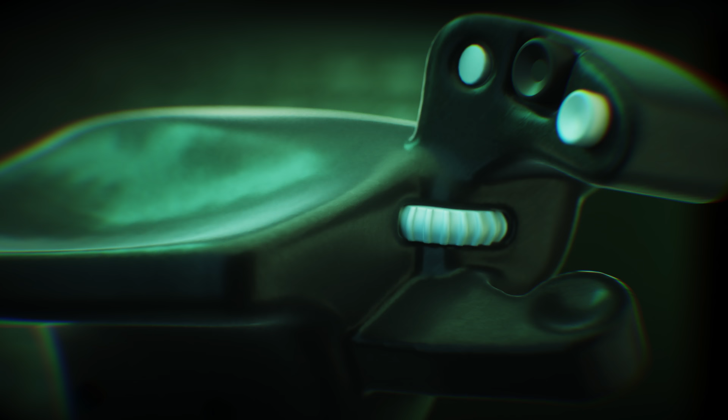With a turn of this wheel, the pilot effortlessly controls the nacelles, tipping them forward, trading vertical rotor wash for forward thrust. As this transition happens, the V-22 is neither helicopter nor plane, and the computer has to gradually blend both control logics together until the transition is complete. But once complete, the V-22 is capable of flying nearly twice the speed of a Black Hawk helicopter.

The V-22 is now flying low to the water to avoid ground radar detection on the coast. It is sprinting at 500 kilometers per hour, reaching the shoreline in less than 30 minutes. The pilots expected the cover of darkness, but they are met with a well-lit, populated sprawl, where they could be exposed to thousands of eyes. Forced to improvise, they thread the needle, aiming for the single darkest patch in a sea of city lights.

Meanwhile, the situation on the ground is becoming desperate. Enemy vehicles have nearly cornered the pilot, and he is forced to call in a danger-close bombing run from US Harrier jump jets, dropping 500-pound laser-guided bombs, obliterating the trucks and forcing the pursuers to retreat in chaos. The explosions buy the crucial seconds needed for the extraction.

It would have taken a standard rescue team hours to fly the 300 kilometers, but the V-22 arrived in just 41 minutes. As they approached the landing zone, the pilot rolled that dial back, redirecting the V-22's thrust at the ground, taking the V-22 from 500 kilometers per hour to a standstill. Opening its rear ramp amid a chaotic man-made sandstorm, the pilot sprints in from the shadows. A simple thumbs up, and in less than 90 seconds, the transformer raises its wheels off the ground, vanishing back into the clouds.

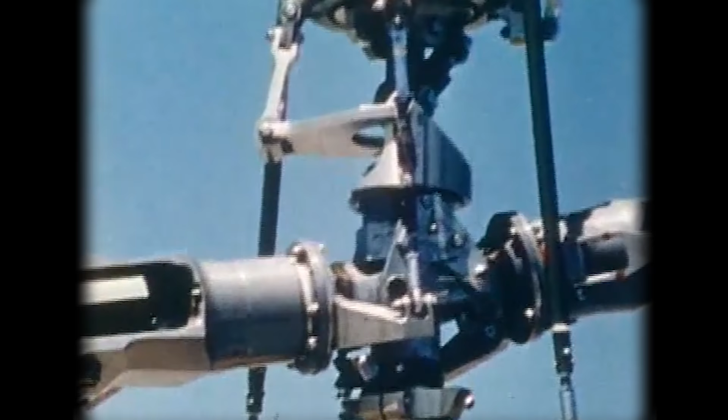The development of the V-22 Osprey began in the early 1950s with the XV-3, a clunky aircraft with a piston-powered engine installed in the fuselage behind the pilot, with a 2-speed transmission allowing the rotors to operate at 2 speeds for hover and cruise. The rotors were mechanically linked to the engine through the wings, with the entire rotor assembly rotating through gaps in the fairings.

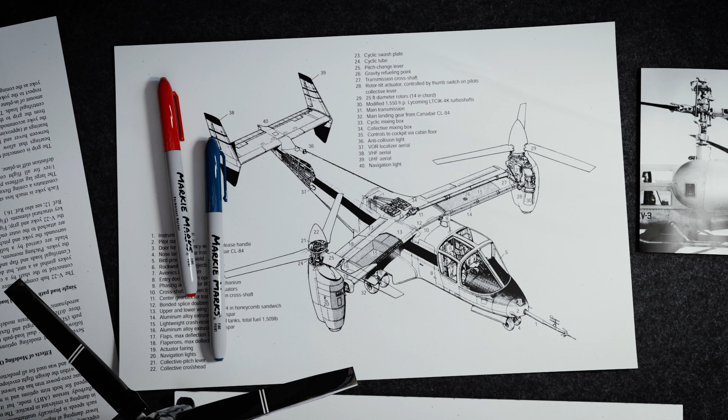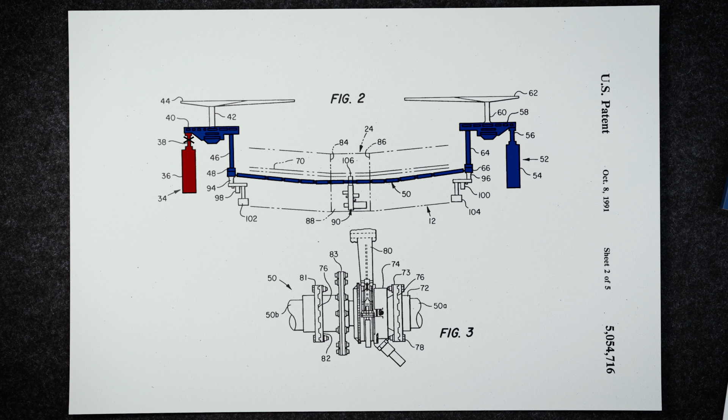But this created a new problem: how to synchronize the engines. The XV-15 developed an engine synchronization system that would carry on through to the V-22, a cross-shaft through the wings to keep the rotors in sync. The only time they would need to carry a large torque would be if one engine failed, where an automatic clutch disconnects the failed engine, letting the other engine drive both rotors through the cross-shaft for a single engine landing. With the smaller load, the shafts and connections could be a lot lighter.

Up to the late 70s, these aircraft were mostly proofs of concept, but everything changed with one failed mission. Operation Eagle Claw was a US rescue attempt in April 1980 to free 52 American hostages in Tehran. The plan relied on 8 Navy RH-53D helicopters flying inland to a remote desert refueling site, Desert 1, and meeting 2 C-130s before continuing on to the city. Dust storms and mechanical failures cut the helicopter force from 8 to 5, below the minimum to continue, forcing commanders to abort the mission.

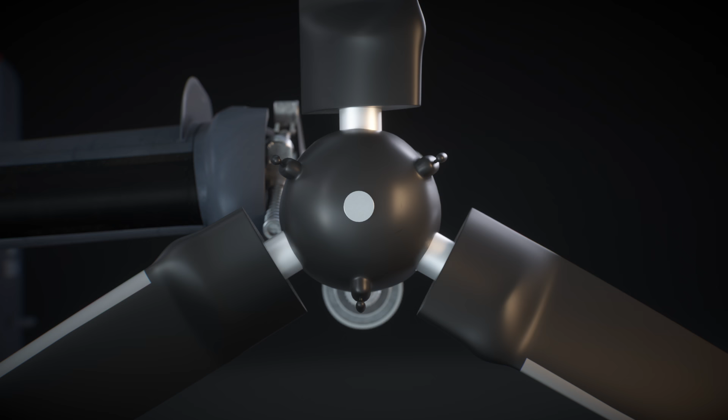Operation Eagle Claw highlighted a blunt limitation. Conventional helicopters could land anywhere, but they couldn't reach deep targets quickly without high-risk refueling stops. So, in 1981, the Pentagon responded by approving a program to design a transport aircraft capable of vertical takeoff and airplane-like cruise, setting the stage for the XV-15's 7-year-long evolution into the V-22 Osprey. The core concept of the Osprey depends on one mechanism, the conversion actuator responsible for the tilt that gives the Osprey its tilt rotor status.

Even though the V-22 can fly with the nacelles at any incremental angle, in practice, to avoid complex aerodynamics, pilots use one of 3 modes: helicopter mode with the nacelles around 90 degrees, airplane mode with the nacelles locked at 0 degrees, and short takeoff and landing mode typically set around 60 degrees. The actual tilting mechanism has to handle a lot of forces that vary drastically depending on the flight regime. When the nacelle is in helicopter mode, the engine and rotor sit in front of the pivot, so gravity wants to roll the nacelle forward, compressing the actuator.

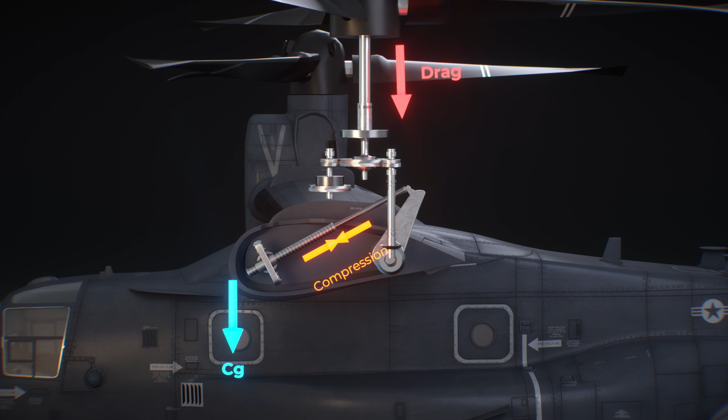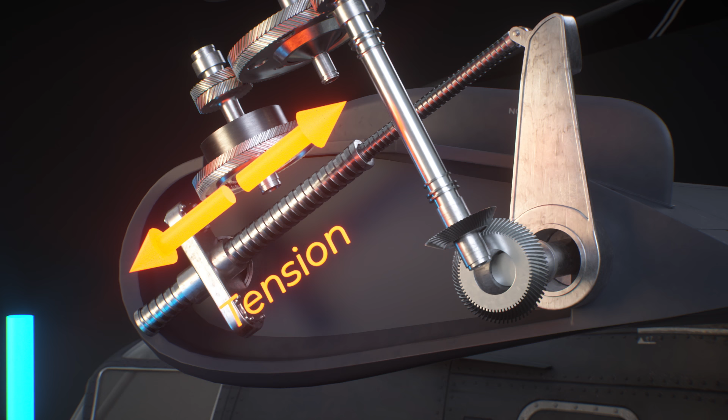But as the nacelle tilts down and the Osprey picks up speed, drag wants to push it back into the vertical position. That compression force decreases until around 80 degrees. As it rotates further, the load flips into tension. But once you get past the 45-degree point, the balance shifts again and the nacelle starts pushing the actuator down, putting it back into compression as it drives all the way down to the 0-degree downstop. Now the actuator's job is to keep the nacelle locked in place.

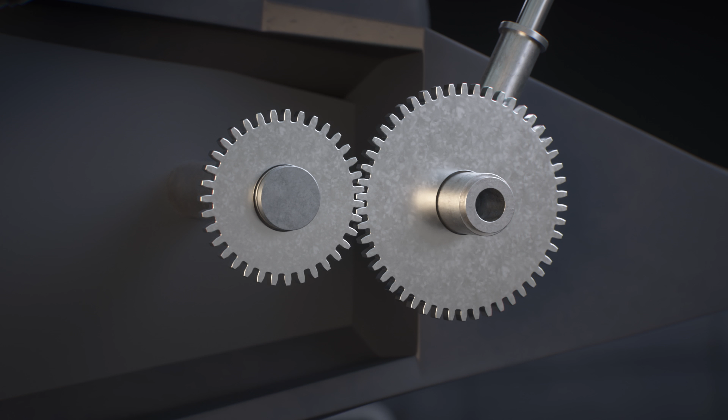With these changing loads, a gear drive would shove huge torque through small teeth that would wear and crack. A screw drive spreads that load through a larger contact area, but there is one problem with using a large, singular screw. The prop rotors reach well below the fuselage of the aircraft in horizontal flight. This means the V-22 cannot land like a traditional plane. If one of those screws jammed in horizontal flight, the V-22 would have no safe way to land. So, instead of having one large screw, the V-22 uses a double telescoping screw that saves space and provides jam redundancy. The size of these prop rotors is a great physical representation of the compromises that the V-22 had to make.

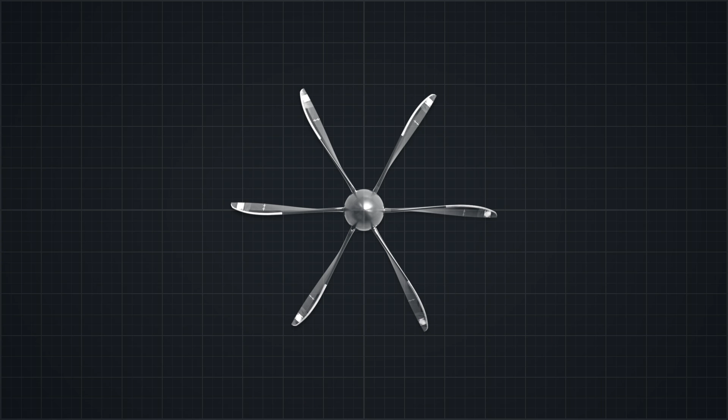They need to be both helicopter rotor and airplane propeller, and this blend of functions is what gives them their unique shape, sitting between the 4-meter diameter of a military transport propeller like the C-130's and the gigantic rotors of the Sea Stallion helicopter. The dual use also demanded a unique twist in the blade profile.

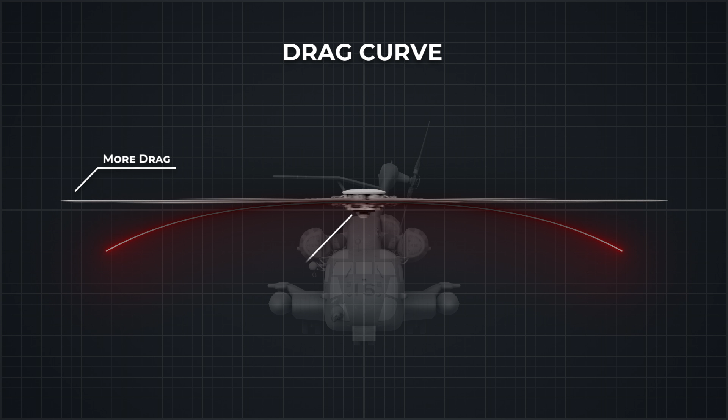Helicopter blades are twisted to adapt to faster flowing air at the tip of the blade, which would result in a disproportionate amount of drag here compared to the slower moving root. So the blade twists, usually around 8 to 14 degrees, to lower the angle of attack of the blade at the tip and balance lift.

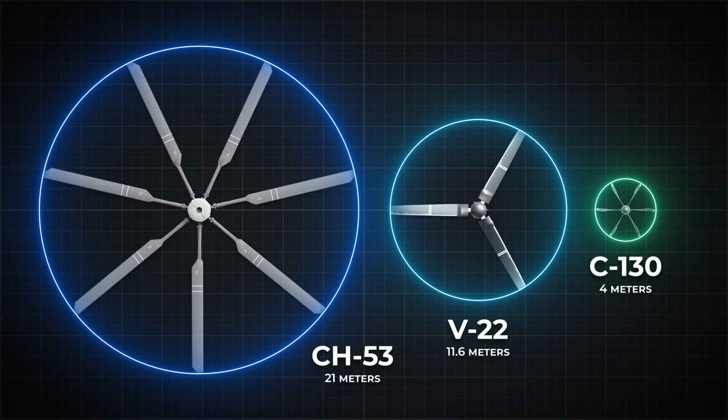The V-22, however, has a massive twist angle of 47 degrees, an aggressive degree of twist driven by the prop rotor's need to adapt to high-speed horizontal flight. These are small helicopter blades, but absolutely massive propellers.

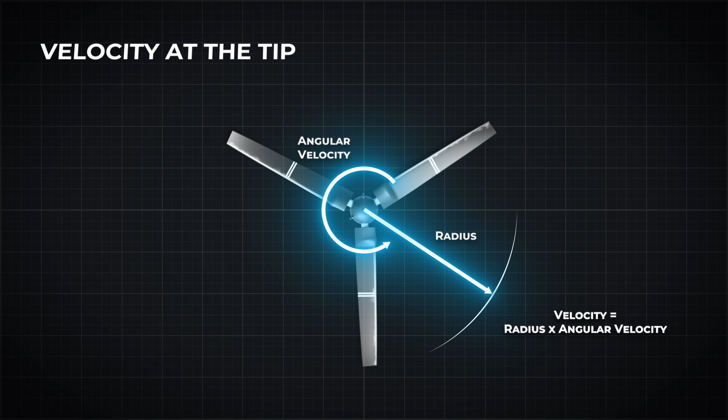In high-speed forward flight, the velocity of oncoming air adds to the high-speed rotation of the blades, with the airflow at the tips flirting at the boundary of supersonic speeds. The high degree of twist ensures the prop rotor can produce lift efficiently across its full length, despite the huge variation of airflow speeds it encounters.

These tip airflow velocities limit how big a propeller can get, and that's a problem because the massive propeller is still a small rotor, and that really hurts the V-22's hover efficiency. Hover efficiency is measured by disk loading, the ratio of an aircraft's weight to the rotor's circular area. A rotor works by pushing air downward to generate upward lift.

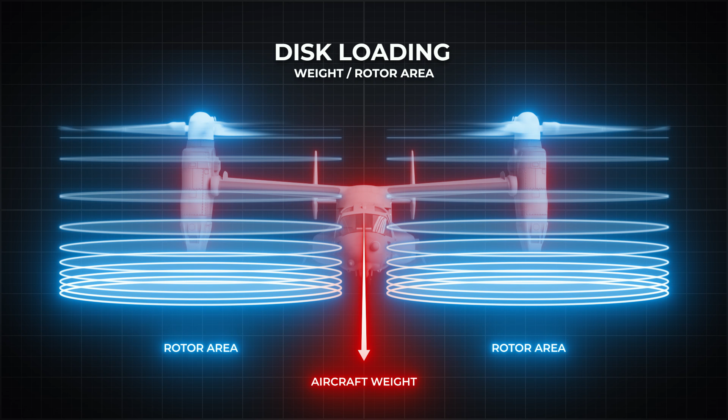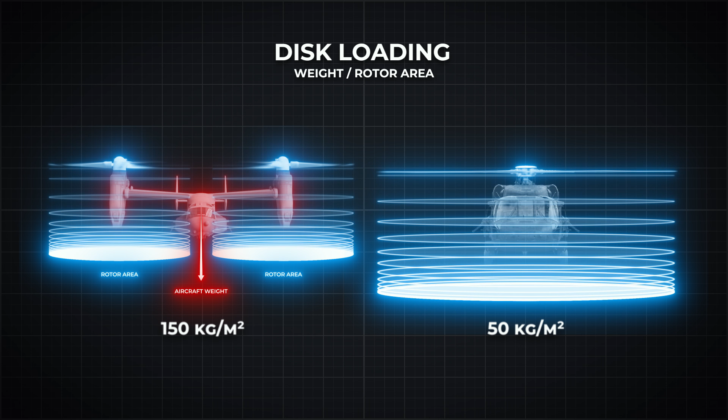A helicopter like the Black Hawk has a disk loading of around 50 kilograms per square meter of its rotor area. The V-22 is closer to 150 kilograms per square meter. That means it needs to push air down much faster to fly. The V-22's downwash can reach velocities of up to 150 kilometers per hour. That's not just inefficient, that's stronger than hurricane force winds, which can make ground crew operations a little difficult.

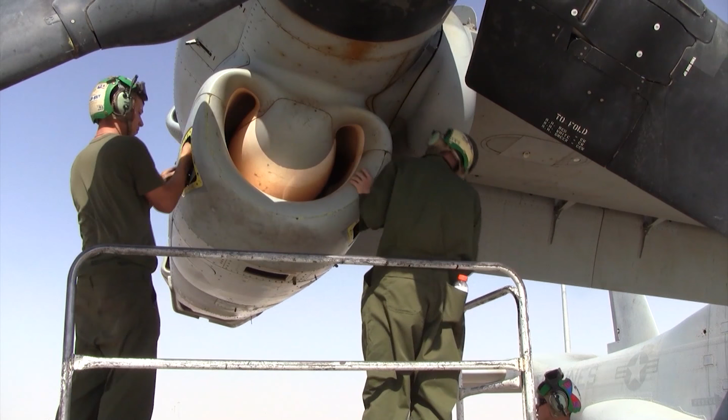Powering the aircraft are two Rolls-Royce turboshaft engines mounted right on the wing tips, to prevent the whirl flutter-induced oscillations that knocked out the test pilot of the XV-3 prototype. The engineers of the V-22 needed light and strong materials to stiffen up the structure, and the V-22 benefited massively from a decade of composite material development for aircraft, like the F-14's first of its kind boron-coated tungsten fiber epoxy composite taileron. Composites are everywhere in the V-22.

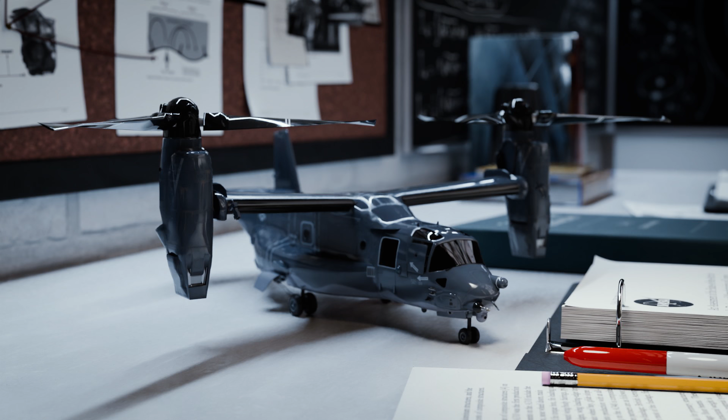2,700 kilograms of the aircraft's total 6,000 kilogram structural weight is taken up by carbon epoxy composites. The wing structure got a stiffer carbon composite than the fuselage or tail, helping it deal with the huge variation of loads it was expected to hold and prevent them vibrating the entire aircraft out of the air. This is fairly standard composite manufacturing now, but back then it was worthy of NASA reports on state-of-the-art manufacturing. I wasn't lying when I said composites are everywhere in this.

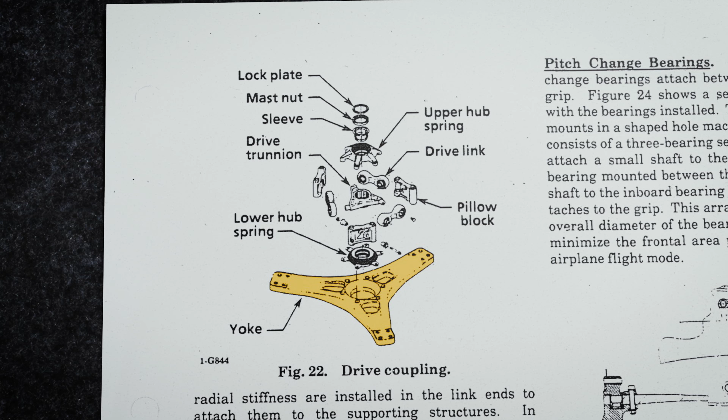But on this long list of achievements, the prop rotors and their multiple parts stand out the most. Take the yoke, a part with a fairly simple geometry, an attachment point for the central driveshaft and 3 more for the gigantic folding blades. But it is constantly being battered by cyclical forces. Picking the wrong material could have it humming like a tuning fork before it cracks and fails.

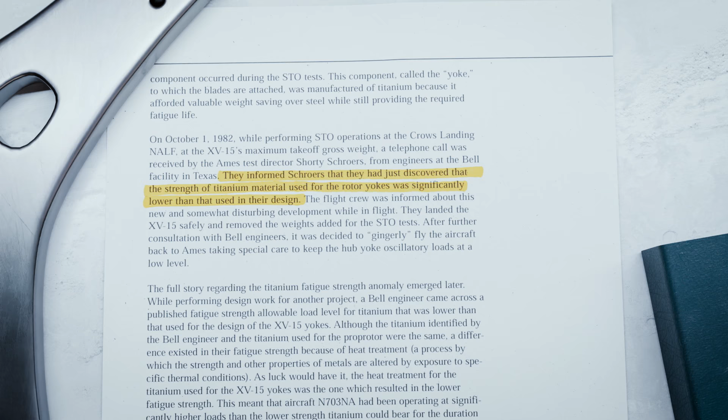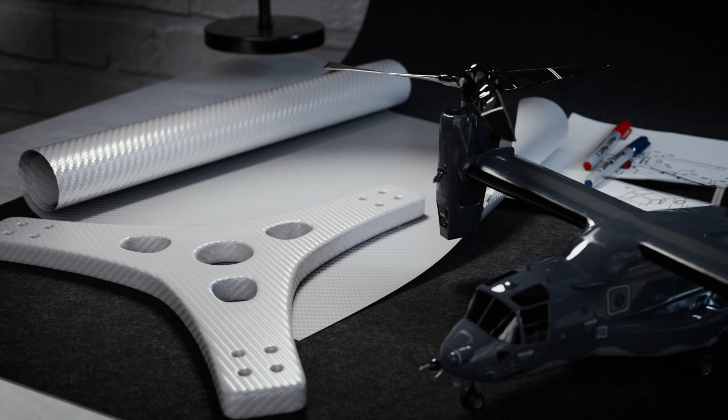Titanium was tested in the XV-15, but it fatigued and cracked too quickly, forcing the engineers to rely on heavier, sturdier stainless steel. By the time the V-22 came around, they had figured out how to make it out of a much lighter S2 fiberglass composite, a glass fiber made from magnesia alumina silicate. Although not as strong as the carbon fiber blades it was securing, this material played a very important role with a unique property: its lower mechanical impedance.

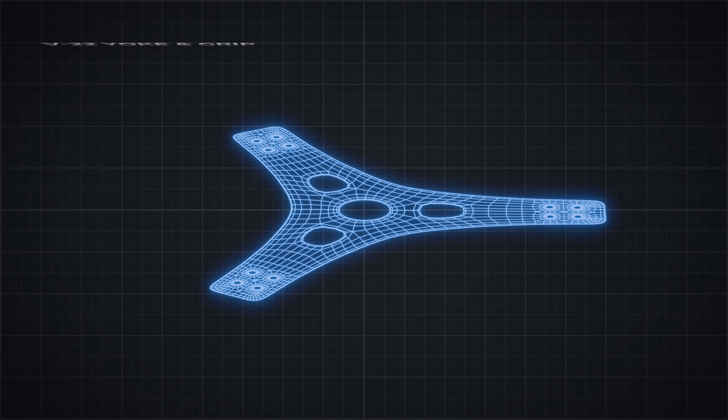It's fantastic at absorbing, flexing, and transferring force without vibrating, which is why it's used in golf clubs and was recently used in the US Olympic team's pole vaults. They added layer after layer of this composite to build up this part to be strong enough to hold the enormous weight of the blades as they swung around and tried to rip free of their restraints, while also dampening a constant onslaught of vibrations that would crack another material.

A problem they actually encountered further up the blade with the carbon composite part. The blade was made from stiffer, stronger carbon composites, but it also needed to fold over itself during the stowing process.

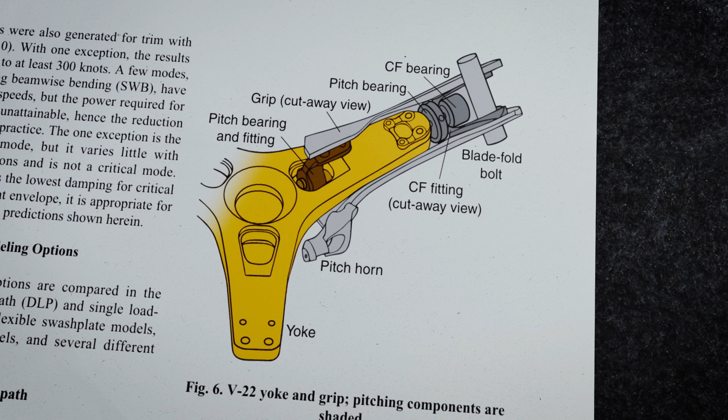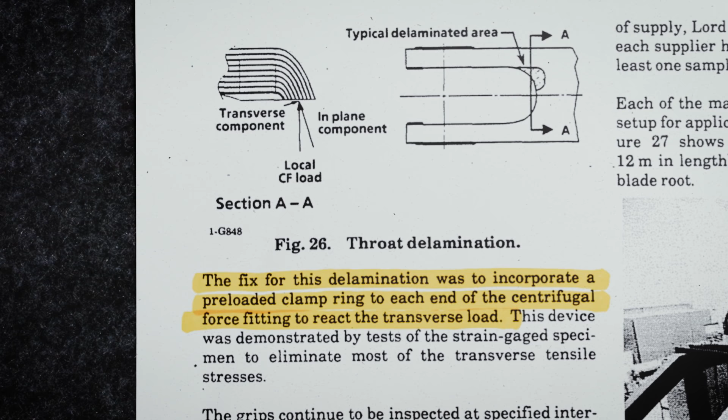During the development of these hinges, the grips kept delaminating and failing, eventually requiring the addition of a preloaded clamp ring to each end of the centrifugal force fitting to react the transverse load. Composites are not tough materials either. High-speed debris strikes can easily shatter them, so they need to be armoured.

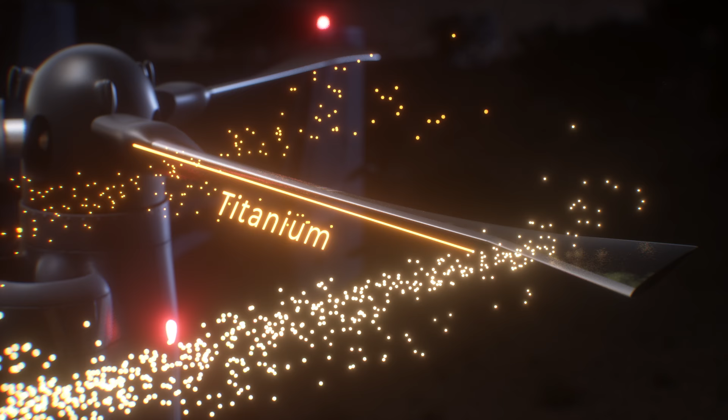The leading edge is protected with a hot-formed titanium strip over the first 3/4 of the blade. Titanium gives a tough, erosion-resistant surface without adding too much weight. Further out, the impacts get much harsher, so further out they bond an electroformed nickel cap. Nickel is harder and more durable against high-speed impacts, but it's also heavier, so they keep it limited to where it's needed. In the worst conditions, these strips of metal act like the titanium skid plates of F1 cars. The blades impact the hard silica sand at immense speeds, creating 2 halos of hot metallic debris.

The rotational speed of these 2 prop rotors need to match, particularly in hover, where unequal lift will quickly cause a crash. The problem was, the only way to reliably ensure that two engines operate at the same speed is to link them mechanically, and the path between them was a veritable mechanical obstacle course.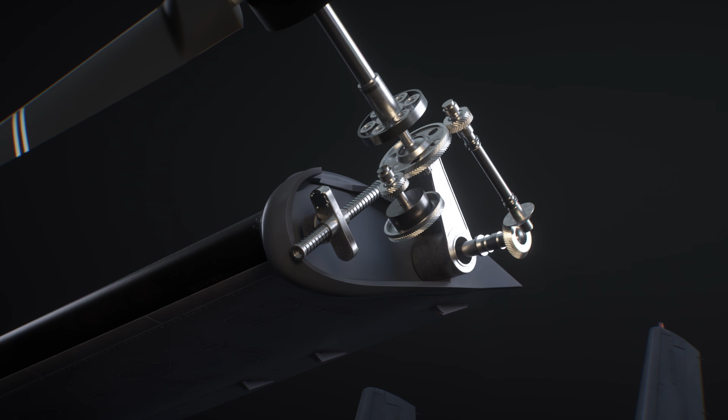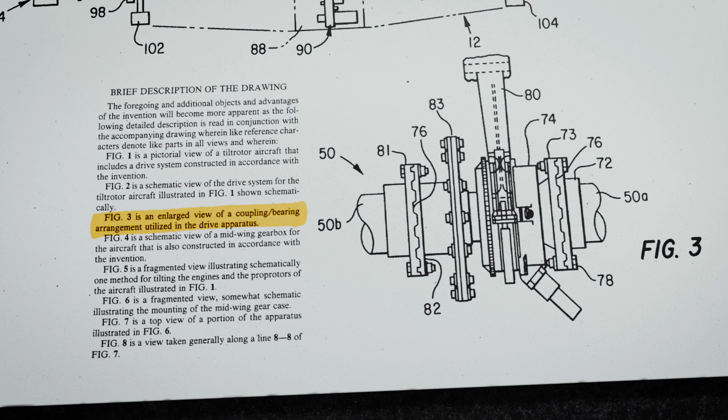On top of navigating these angles, this drivetrain had to deal with the nacelles rotating, the wings flexing, and the entire wing rotating parallel to the fuselage on a giant ring, all the while rotating 6,300 times a minute, and in the event of an emergency, be capable of transferring half the engine's torque to the other engine, so it could land less aggressively in an engine-out situation, with a final prayer that they could somehow not make this a nightmare to maintain.

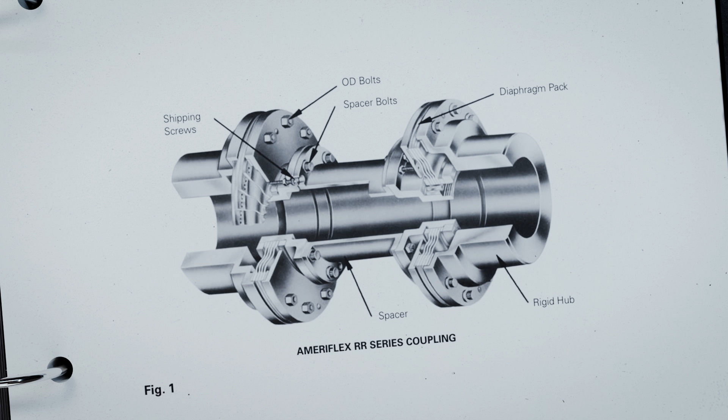Remarkably, the V-22's engineers developed an innovative, lubrication-free coupling system, replacing the lubricated gear system of the XV-15. A flexible coupling that was stiff in torsion and could handle spinning at 6,300 RPM and do it even if the shafts moved 3.5 degrees out of alignment. This is called a multi-disc convoluted diaphragm flexible coupling. You can buy off-the-shelf versions yourself, but the V-22 was an extreme, early application of this technology that drove development.

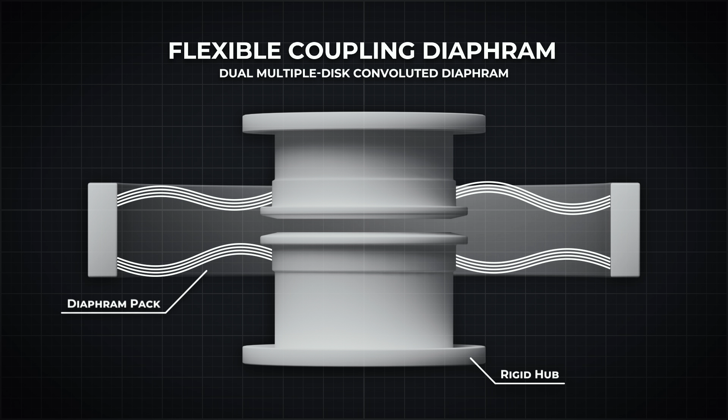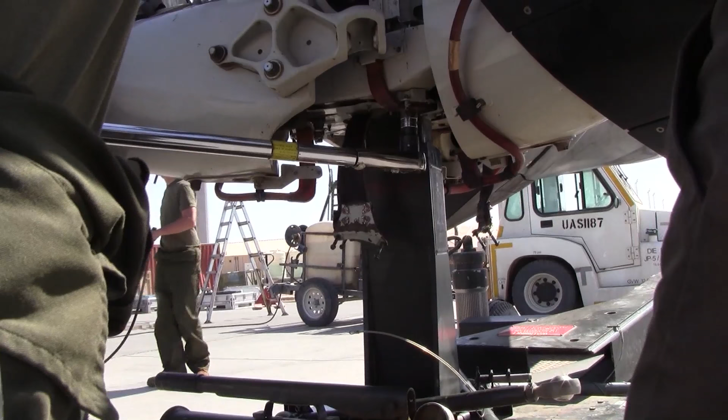Each shaft has a stack of thin 0.2mm stainless steel diaphragms with spacers attached. Multiple thin discs offer more flexibility than a single thicker disc, like the leaf springs in a car. The convoluted part simply means the discs aren't flat, they have this wave pressed into them. Being lubricant-free and a simple disc made replacing them easy, which made the V-22 maintenance crew's life slightly less of a nightmare.

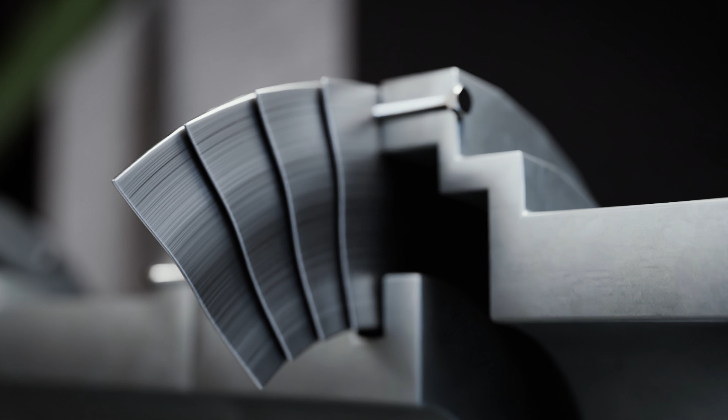But honestly, this part is remarkable in its simplicity. In 25 hours, this 0.2mm thin disc goes through 10 million revolutions and deals with being shoved, shook, and bent out of alignment over and over again. And thankfully, when a disc starts to fail, its squeaking is easy to hear. And even if one failed, the V-22 was good to keep flying for another 5 hours at maximum torque.

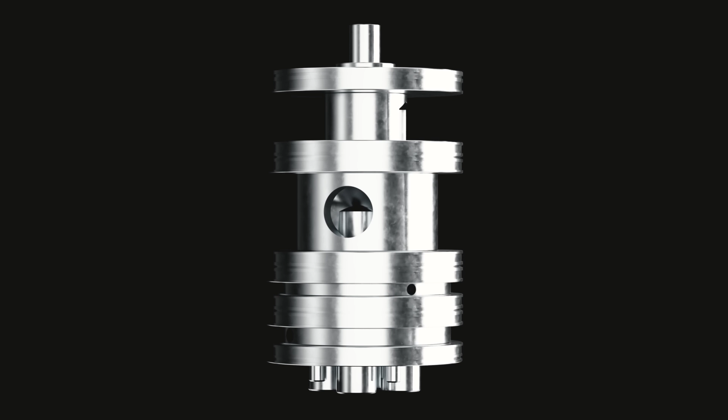To make things even more difficult, there are fuel tanks located here in the sponsons, and that fuel has to get to the engines, located all the way out here on the other side of a giant rotating coupling. Documents on how this worked are sparse, but from the clues I could piece together, I think this actually worked remarkably similar to this rotating house that appeared in a Tom Scott video. Essentially, you carve sealed grooves into a stationary ring and then cap that with a rotating cover. Our team actually animated this for Tom years ago.

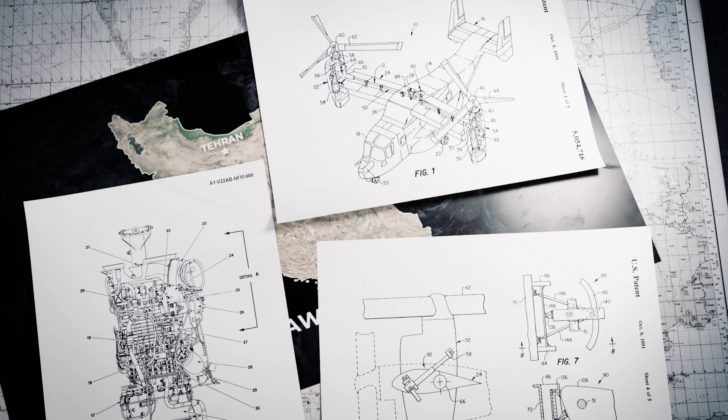Thankfully, this coupling didn't need to deal with high-pressure hydraulic fluid, as the auxiliary power unit, mid-wing gearbox, and hydraulic pump were all mounted inside the rotating wing. The V-22 is truly a mechanical wonder. The drivetrain packed into this rotating wing is bewilderingly complicated.

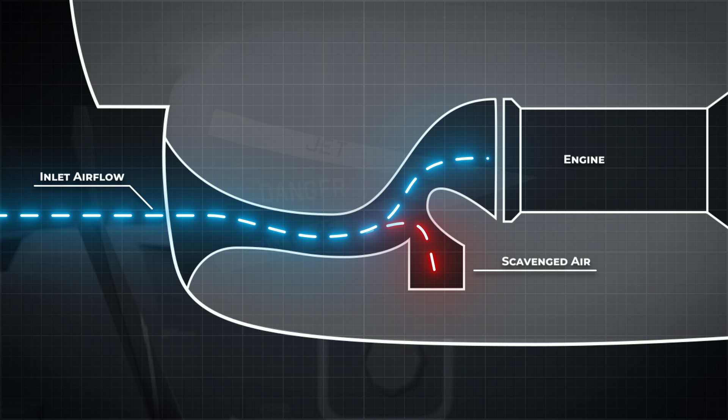The V-22's self-imposed tornado can cause havoc for the engine's compressors, but the engineers went to great lengths to minimize the pain and suffering of the maintenance crews once again, with some clever aerodynamics. As the air enters the engine inlet, it's forced to make a sharp turn. Clean air can follow the bend. Heavier grit and sand can't turn as easily, so it separates out and gets routed away.

The engine output is geared down to between 412 RPM for vertical takeoff and 333 RPM in cruise. One prop rotor gearbox gets an extra gear to spin it in the opposite direction. This cancels out the adverse rolling moment that the huge gyroscopes mounted on each wing create.

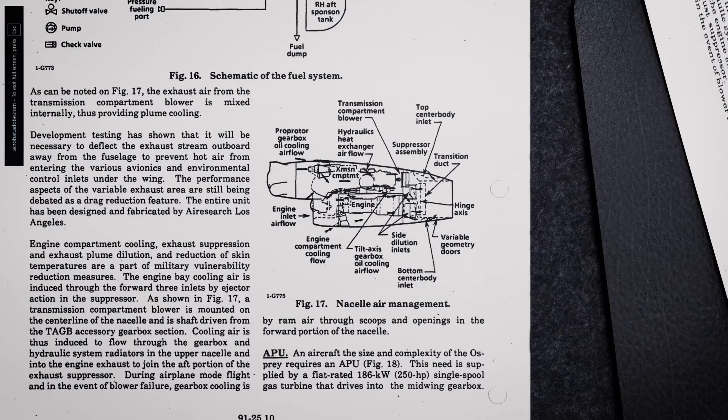After the turbines, the airflow is pushed through a mixer that deliberately drags in cooler outside air and blends it with the hot exhaust before it exits. So instead of a tight, bright hot plume, the exhaust gets spread out and cooled down. And it's aimed outward away from the fuselage so the hot flow isn't blasting nearby structures or getting pulled back into other inlets.

With all of these complicated mechanics, the Osprey has garnered a reputation for being unsafe. But what does the data say? Since 1991, there have been 25 incidents involving the V-22. 9 were caused by pilot error, 10 by mechanical failures, 2 were a mix of both, and 2 are still under investigation. This has led to the unfortunate death of 58 service members and has injured another 52.

But how does this compare to 2 other helicopters, the Sikorsky H-60 and the Chinook H-47? Since its debut in 1979, the H-60 and its variants have had 390 incidents, resulting in 970 deaths. 60 of those deaths happened in the last decade, which is 2 more than the V-22 has caused over the past 30 years. The H-47 has historically had the Army's highest death rate per incident.

Between 1966 and 2005, 238 lives were lost in 10 non-combat crashes. But in recent years, the H-47 Chinook has had a huge improvement in safety, with 47 incidents and no deaths between 2016 and 2020. Simply comparing the number of deaths does not take into account how many aircraft have been built and how much they fly.

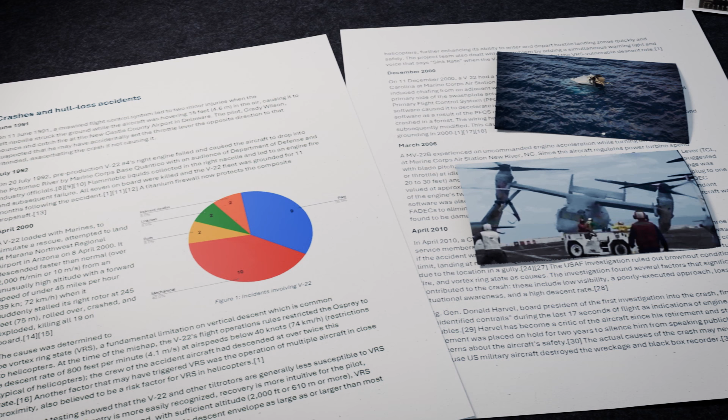In accidents per airframe, the V-22 fares quite well with only 0.0625 incidents per airframe, compared to 0.075 and 0.11 for the H-60 and H-47. But if you look by how much flight time, the V-22 has more deaths per 100k hours. This data shows a couple of trends.

Larger aircraft like the V-22 or H-47 tend to have higher death rates per incident because they carry more people, increasing the risk per crash compared to smaller aircraft like the H-60. Also, more complex aircraft usually see a spike in incidents early on as problems are identified and fixed, but these issues tend to decrease over time as the aircraft matures and systems are improved.

These comparisons are not intended to put the V-22 above other military aircraft or dismiss its safety record. No aircraft is without flaws, and every accident is a stark reminder of the risks faced by service members. However, the data clearly shows that the V-22's safety record is not an outlier.